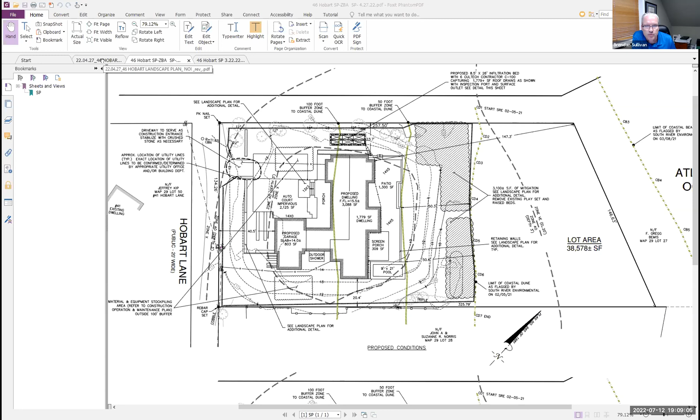Floodwaters come over the dune, they go around the house, and then they pretty much go out to Hobart and then down Hobart, ending up heading down towards Charlie's house over on Lothrop Lane.

I believe you received the revised plans and also a memo supporting the petition under the special permit guidelines for section 300-9.7H. I think I've addressed all of those issues in that, and I think that's really about it.

Okay, board, questions of the applicant representative? One thing that came up - this meeting was originally in May, and looking back at the notes, John Hallen had made a comment regarding the pool's proximity to the house. I think when he made that comment, I was looking more at the pool's proximity to the side and rear property lines.

My understanding, looking at it further, is that the pool would have to be 10 feet distance from the house wall for electrical and fire safety purposes. Looking at the site plan, it doesn't seem to achieve that. If we were to try to achieve that, it would push it beyond the 50-foot buffer. I'm not sure if you've looked at that issue.

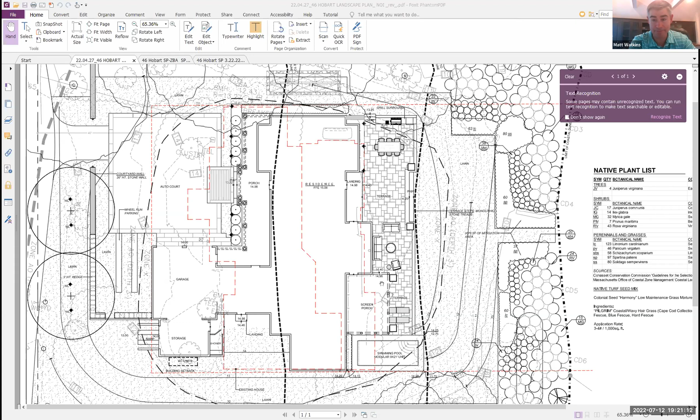And then Brendan, can you walk me through the memo that you submitted, if you have it handy? Again, to Dave's point, I know these are very minor alterations in the floodplain. I don't have any issues with the plan, but I reread number 1 a couple of times and was trying to understand the corner of the proposed pool. If you don't mind, just walk me through number 1 one more time, just for my own sanity.

Yeah, so it's this triangular piece, the corner of the proposed pool, which is down here. Because this type of floodplain is shown graphically on the flood map, not by elevation, and it circles around the existing house, similar to the one next door. The intent was obviously to take the existing structure out of the floodplain. So this dashed line here is the floodplain as it's transposed from the flood map. The corner of this proposed pool is this triangular shape here, and that is the only portion of the pool that is in the floodplain.

As I said before, the way this floodplain works is there's a coastal dune out here. The waves come over the dune, crash over it, run towards the house, and go around the house to either side. The existing structure is actually wider than the proposed structure. On the northern side, we came back a couple feet.

We're really not changing the grade on the sidelines much. We're reducing pavement totally around the southerly side. There's currently a garage under the southerly side of the house, which is all pavement, and there's even some pavement that spills onto the abutting property that we're getting rid of. So those floodwaters will now run over a vegetated lawn area instead of pavement, which would slow the water down and promote infiltration. And overall, believe it or not, we're decreasing the impervious surface by about 100 square feet. So with all that, we think this meets the provisions of the bylaw.

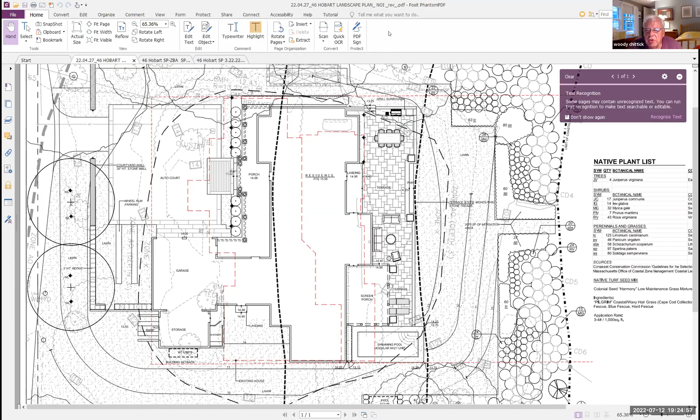Yep. Charlie, are you muted still? Charlie is recused from this one. That's right, sorry. So he's not voting. So it's a 5-0 vote to continue this hearing until August 15th. Thanks.

Okay, we will move on to the third. Either Cohasset Lobster LLC or the Cohasset Wharf, I'm a little confused as to which title, but it's all the same, at 46 Border Street. And we will, I'm assuming, hear from Attorney Adam Brodsky, who's representing the owner of this property. Is that correct, Cassandra? Yep, I'm bringing him up now. Okay, great.

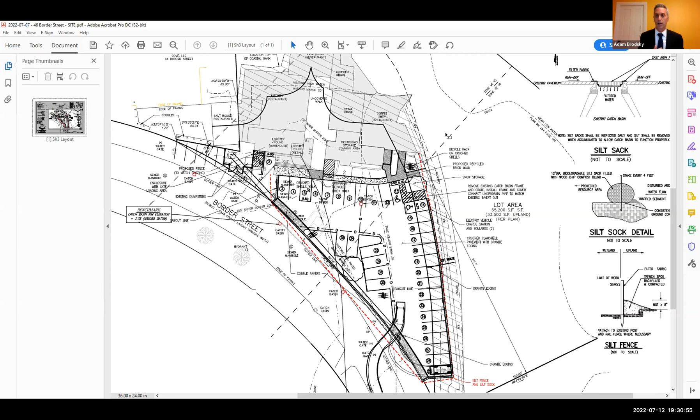You should also note that Cohasset Lobster is committed to purchasing electric vehicles called Rivians, which they want to use for transporting potentially employees as well as potential customers. As I said, under this proposal, the board controls the final approval of any off-site parking, but we need additional time to finalize that. Gabriel is prepared to answer Mr. Higginson's questions - he provided an email on July 8th with a summary of his conclusions and also provided a sketch. He's available when I'm done.

Ideally, we'd like to reach at least an agreement in principle with respect to parking this evening. We've continued both our planning board and conservation commission hearings until we've reached final agreement, or at least a constructive agreement regarding parking, because that affects the layout of the site, the design of the stormwater management system, and things like that. So in a perfect world we'd like to reach conceptual agreement with the board that we've addressed your parking concerns this evening, so we can go forward with our other permitting. With that said, I'm happy to answer any additional questions, but Gabriel is prepared to present and answer Mr. Higginson's questions. Why don't we get Gabriel's response out of the way first? Yes, sir. And then we can deal with any lingering parking issues beyond that.

Good afternoon everyone, my name is Gabriel Padilla, I'm with Grady Consulting. Can everyone see my screen? Yes, I can. I think so. Make the assumption. Perfect. So the questions that came out of the last meeting, in regards to some spaces - space number 1 actually has conforming dimensions, 9.5 by 20. Same with number 2.

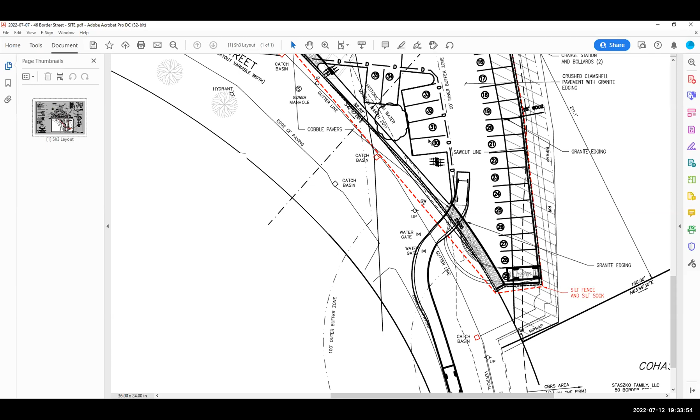So those were the questions that they had. If you have any other questions, I'll be glad to answer them. Okay, Board, anybody have questions? Or if Charlie could unmute, maybe we could hear from him as well.

I thought this was unambiguous, clear. But that's a party of one. Any other questions on the part of the board? Guess not.

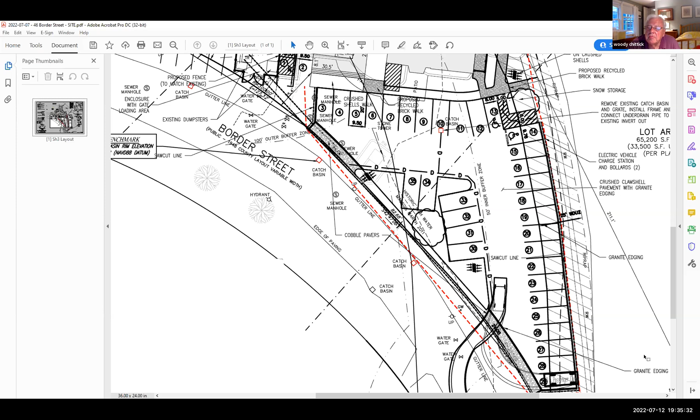Okay, well, we can always come back to that if somebody is coming in late. But Adam, I've got a few thoughts on what can be done, what you can do, and what you're not empowered to do, but might be supportive. We can talk about some of those measures which are really off-site in one form or another. But do you want to present, go forth with the fact that you think your parking complies, but you're not giving up trying to find some off-site parking? I'm putting words in your mouth, but for employees and patrons as needed.

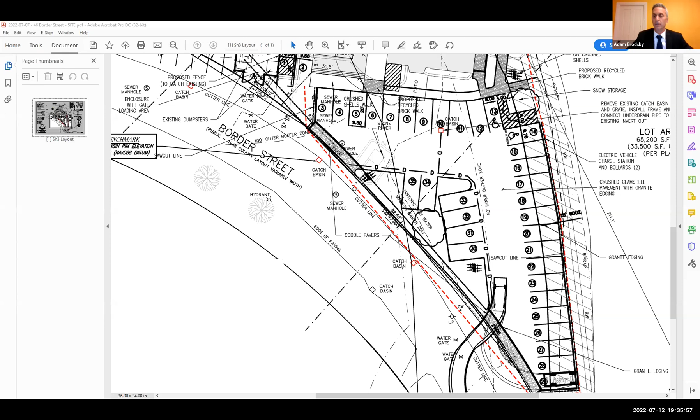Yes, sir. Again, just to be brief, we believe that the proposed on-site parking conforms to your parking requirements, and we're trying to address the board's concerns about additional parking for employees. So we're willing to agree as a condition of any special permit that we have to identify 10 additional parking spaces off-site, subject to the board's prior approval, in order to satisfy that requirement.

Okay, let me talk about a couple of things. I think one of the issues is the physical layout of Border Street itself. You're not responsible for that, nor are we per se, but I would like to think that we could go to the select board at an appropriate time and deal with parking as it extends from the former Mill River Marine all the way down to the Veterans Memorial on the following basis.

Request that there be a kind of physical reconstruction of the sidewalk with actual curbs as opposed to rounded curbing. It seems to me that rounded curbing invites people to drive up on the sidewalk and park. If you go down to the Common in Cohasset and see what they've done there, those are basically granite 90-degree angle curbs, and there isn't parking on the sidewalk down there now. There used to be, but I think the town has it within its authority to clean up that anomaly.

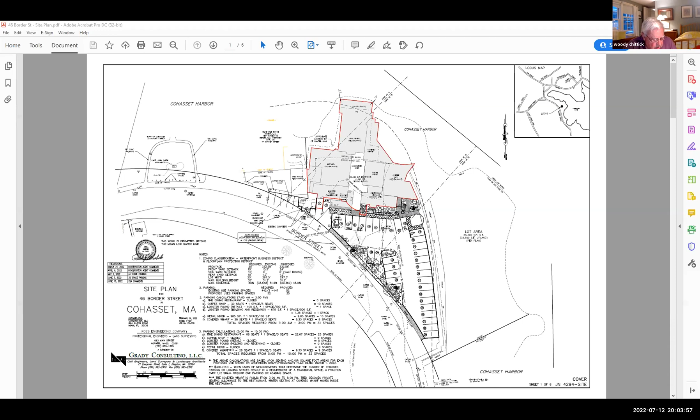Chairman, it's Adam Brodsky again. What a surprise. Okay, it's your lucky night. And obviously I represent... Do we have a trifecta coming up with the Whoriskeys? No, I believe that Mr. Orenberger's office represents them.

This board's familiar with the property at 103 Border Street because it approved a special permit to reconstruct the existing non-conforming dwelling just prior to the Lubitzes purchasing the property in 2014. In fact, they purchased the plans for that project, which is comparable in size to what is being proposed this evening, but candidly was just not aesthetically consistent with the historic character of the neighborhood. So we have a different proposal to present.

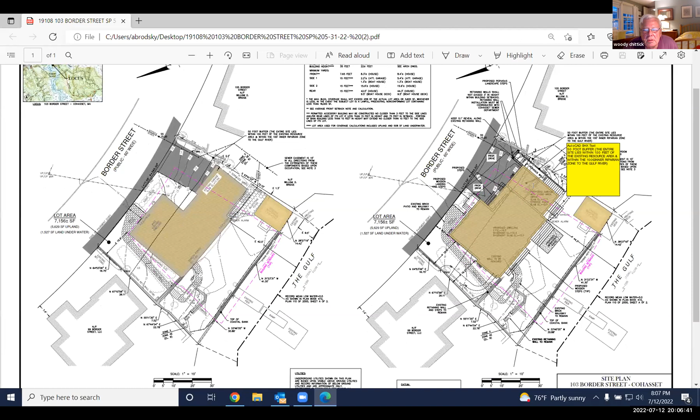This concerns a pre-existing non-conforming lot with 7,156 square feet located within the Residence A zoning district. May I share my screen and I'll try to display something. Should be able to. Thank you. One moment. Can you see the site plan? I can, I guess, down at the bottom, existing and then proposed. Yes, sir. Thank you, I'm impressed with my limited computer skills to be able to do this.

That is correct. The existing conditions are shown on the left side of the site plan, and the proposed conditions are on the right side. You'll note the existing dwelling on a non-conforming lot. A portion of the lot is also located within the FEMA AE flood zone elevation 9, and you can see the flood zone essentially cuts through the building. The lot is improved with a Greek Revival dwelling that I understand was originally built in approximately 1880 by Portuguese fishermen. As I mentioned, the Lubitzes have lived there for close to 8 years.

The dwelling is candidly outdated and not suitable to their family of 5. It's also uneconomic to substantially repair it, and so they're proposing to raise and reconstruct the existing dwelling. The existing dwelling is non-conforming. It extends into the side yard setback to the south, and the attached garage is only 2.2 feet from the sideline. In the A district, we're required to have 15 feet.

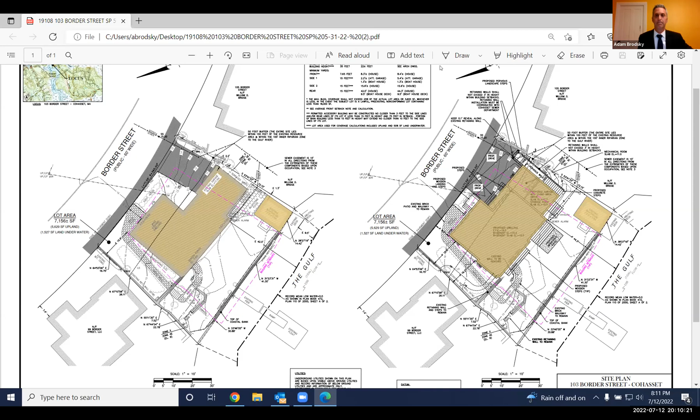I'm happy to pull up the architectural plans. I just want to speak a little bit about those, if that's all right. You're not changing the boathouse, I assume? That's correct, we're only talking about the dwelling. So excuse me one moment.

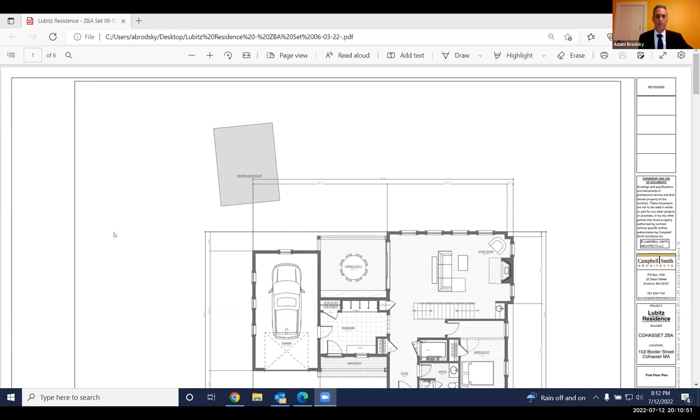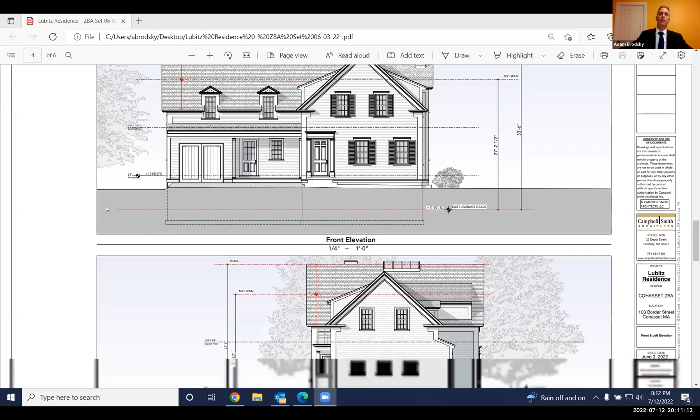Hopefully you can now see the architectural plans. I'm going to go to the elevations. This is the front elevation from Border Street. You'll notice that the structure will be 2 stories at the street, and from the rear will be 3 stories, the left elevation from the rear.

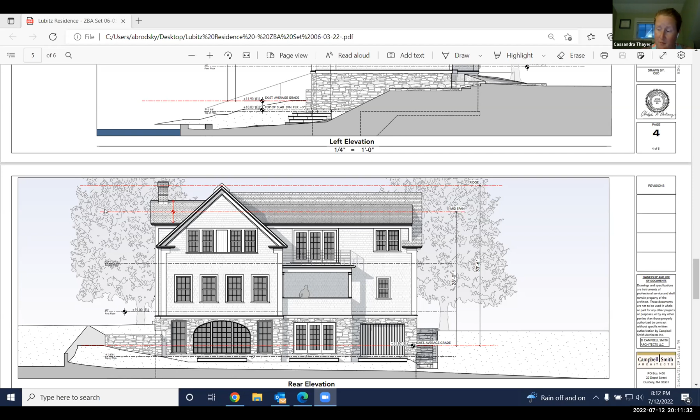The proposed building height is 33 feet 4 inches, obviously less than the maximum of 35 feet as depicted on this elevation.

The building volume within the setback increases from presently 2,040 cubic feet to 3,948 cubic feet. And the total gross floor area within the setback increases from 476 square feet to 568 square feet.

I should note, and I probably should have pointed this out on the site plan, there's an existing driveway which actually slopes steeply down from Border Street and creates a really unsafe condition trying to back out of that steep driveway to get to Border Street. The Lubitzes are proposing to regrade and widen that area, so the driveway will slope down to Border Street, making a much safer condition.

Importantly, the existing dwelling is non-compliant with respect to flood compliance, and the new structure is going to comply with the state building code flood-resistant construction requirements in all respects. Because a portion of the structure is within the floodplain, we need a floodplain special permit under section 309.7H. The project will require an order of conditions and a stormwater permit from the Conservation Commission that will ensure compliance not only with the state.

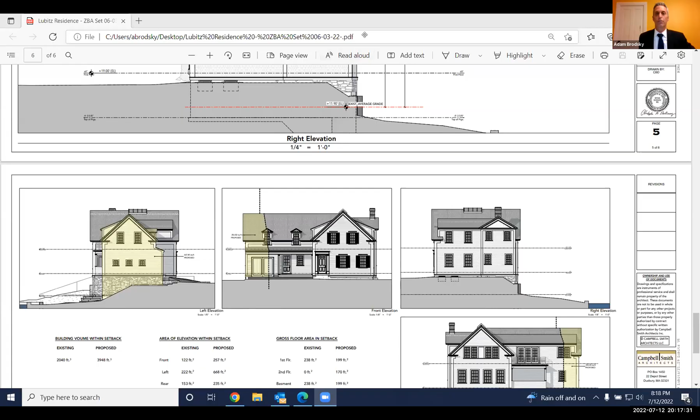And it's not the property writ large, it's the proposed structure. Yes, sir.

I think the problem here is that it says the land, if the land is subject to tidal action or adjacent to tidal waters, the proposed structure is not less than 10 feet above mean sea level. Your response is it's not subject to tidal action or adjacent to tidal waters, but it is. But it is above 10 feet above mean sea level. Yeah, that was my point. I don't think adjacent is the issue. Is it or is it not more than 10 feet, which I think it would be. It is, so I think you've satisfied that.

Your one-liner doesn't accurately reflect what you need to do. I note the problem. As Charlie said, it's not really shedding light on it, doesn't affect anything.

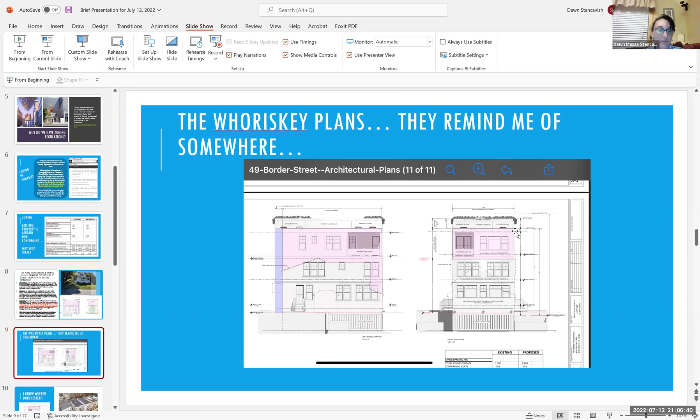So, this is again a close-up of the plans. This is the block itself that is being proposed. It was called a beach house. It doesn't really look like a beach house to me, because the only thing that could come to my mind was this. And I really don't think that this fits into Cohasset Harbor.

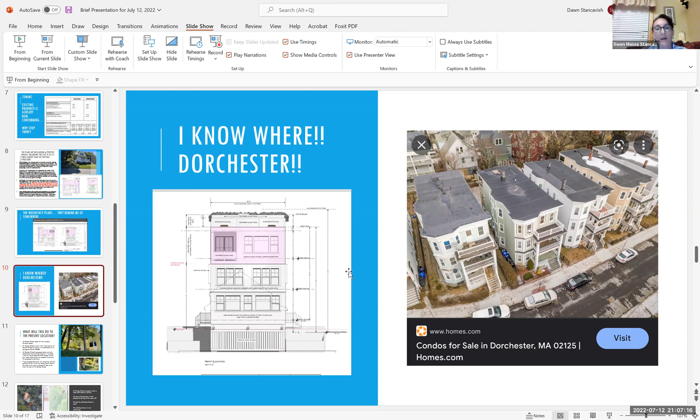And I'm all for wanting a family to have space, and we're very happy if the Whoriskeys really are intending on staying in this home. It's just unfortunate that it went from conversation straight to, okay, if you're not gonna work with us, we're gonna go to the full max that we think that we could get away with. And what will this really do here?

Next slide gets into how that affects the FEMA zone. But it just doesn't have the proper physical space for what's proposed. And to say it's only a little bit outside the existing footprint is a gross exaggeration. These pictures kind of show it all.

Here's the plot of land right here where my cursor is. That's 49. This is 51. This is the sky view from the Whoriskeys documents. This red line is roughly where the property line is, but it's also directly where the cliff is. And that's very rough, but it gives you a visual of, as the crow flies, how closely these homes are already to each other. And the fact that it's not just a flat surface here, it's a rock cliff is what is very concerning.

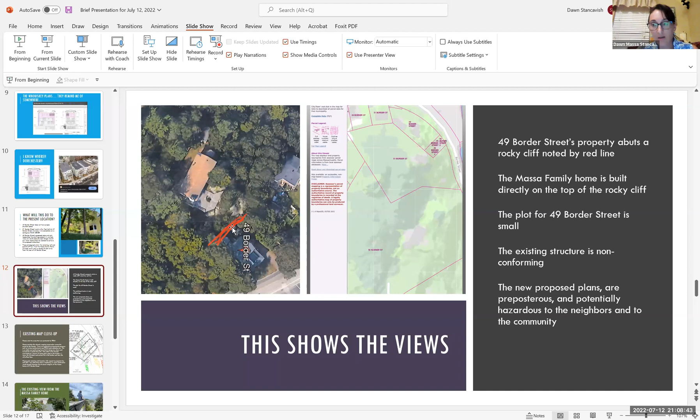So in this - could you just take a breath for a second? Sure. Why does a rock ledge concern you, or why should I be concerned?

Oh, thank you for asking. I'm happy to answer that. Because whatever proposed means of construction with heavy machinery or any other thing that might be needed to dig up a foundation in a rocky area, where it's all granite and it's all kind of stuck close together - if anything cracks within that rock cliff, the structural integrity of my family home is immediately affected. And it's also a harder location to do any repairs to.

If you damage that rock cliff, I don't know how you'd even go about fixing that. If that integrity gets damaged and the house gets shaken up, and the pipes and everything are also damaged, that's a huge liability.

I'm concerned for my family members' well-being, for her mental health, her psychological health, her physical health. And I'm concerned that all of her utilities go from the street between the properties up to her house as well, and it's a weird layout of how those things are because of the rock that's there. It makes me very concerned about how it could impact her life and the actual property that my family holds.

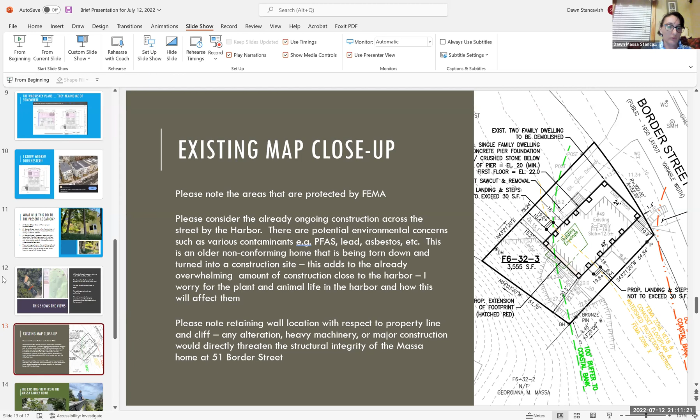A brief story of what happened: my in-laws lived in New Jersey. A home was built too close to their house. It cracked their foundation, it was condemned. My elderly grandmother-in-law had to be physically removed professionally by ambulances because of what they did. If you think I want to sit and let this happen to a family member, you're out of your mind. I can't do this again. I already went through this, and it wasn't even as dangerous as what this is.

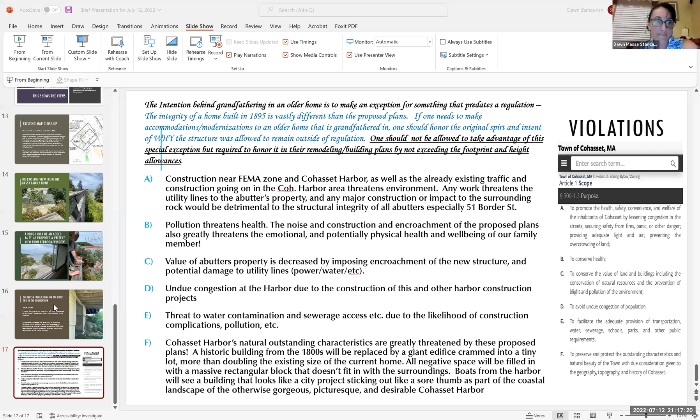Would you go to the next to the last page? Yes, one moment, I'll get it back up. Yeah, the one before this one. Yep, here it is.

Okay, let's go to the second paragraph. I'm not sure I understood—the building plan proposes an approximate volume increase exceeding 30,000 cubic feet beyond what is presently allowed by existing regulations. What existing regulations are you referencing?

I'm referencing the zoning regulations referenced here. So what they're saying in the non-conforming volume is 26,474. But what I said here was that they didn't count the top deck as part of that calculation, which is approximately 4,000 cubic feet. So that should be added to the 26,474, which it is not in their plans. That brings the total to beyond 30,000 cubic feet over the regulations.

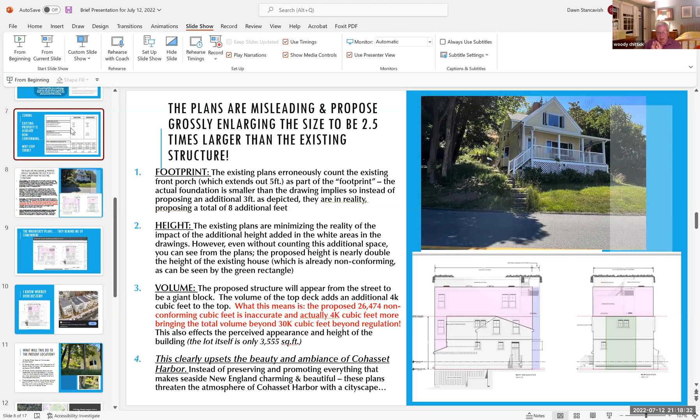And the regulations being the pre-existing non-conformity. Exactly. That's the 30,000 proposed additional. It'll be, instead of—like right now it's here—instead of this, that's a misleading number because they didn't count the top deck.

Well, certainly, just sitting here, it would seem to me they have to count the top deck. That's volume, and it's volume for human habitation, whereas the bylaw deals with habitable space. So it's habitable—there's no question.

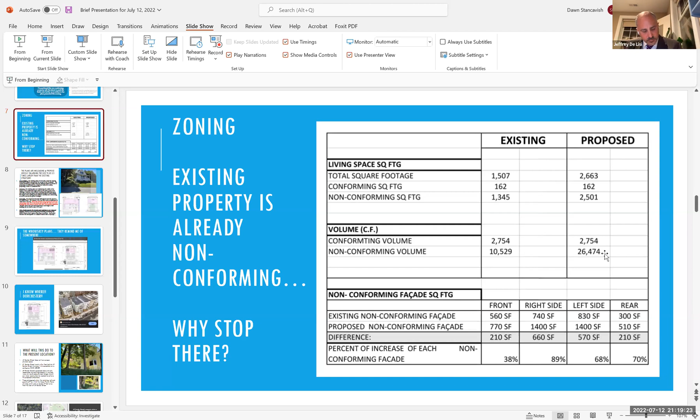If I may—as we're listening to the presentation, I'm recalling a conversation we had with the board involving the building inspector, Mr. Hallen, on the Ryan Stasco property, the Jerusalem Road property. There was a discussion about a roof deck, and I believe Mr. Hallen expressed an opinion that because it was not covered, it doesn't count as part of the calculation. So we might want to check with the building inspector on that.

I don't see it in the bylaw. That's the problem—that may be his interpretation, but it's not the way the bylaw is written. Except that he is the only person in the town charged with the authority of enforcing the bylaw. Well, we're charged with enforcing the bylaw too. Right, but he makes the first interpretation, and depending on his interpretation, the determination is made and brought before the board, right? Right, and we could accept or deny that interpretation—we don't have to accept his interpretation.

So where in the bylaw does it say that the deck counts as habitable space? How do you count habitable space which is uninhabitable in the wintertime? It's still habitable—it's habitable in the summer. I'm not saying it's 365 days a year, 24 hours. But to that point, it's a deck, and you would not include the area of a deck as habitable space.

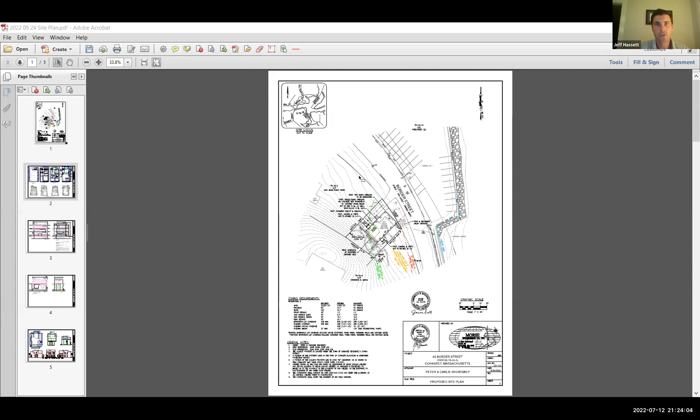But at any rate, Jeff, why don't we turn it over to you then? Sure, thank you very much - the other Jeff. So on the site plan, this property, as you know, is on the westerly side of Border Street, with the Atlantica, or formerly the Atlantica parking lot, directly across the street beyond to Cohasset Harbor. The Massa property is shown on the site plan to the west as well.

So the site plan does correctly label the front yard setback measured to the existing porch. This is a front porch with a roof over it, so the front setback is indeed measured to that. Typically we do not include outdoor space in the floor area. However, if you looked at the assessor's card currently for the finished area, it would not include the porch area, and certainly not decks. The house being proposed is 2,600 square feet, not including the deck.

So it is consistent with other homes in the neighborhood. It's not a monster home. The footprint is 24 by 42, which is the same size footprint as the existing home. I understand we are going up.

As far as the height, the first floor we're proposing is at the lowest elevation that's allowed, because the property is in a FEMA floodplain. And then with the flat roof, it's elevation 52. The site plan shows topography offsite based on LiDAR topography, which is usually generally very accurate. The contours aren't labeled on this plan, but I can tell you they vary from elevation 52 to 64. So the ground immediately adjacent to the Massa home is slightly higher, or several feet higher in elevation, compared to the roof of the proposed structure.

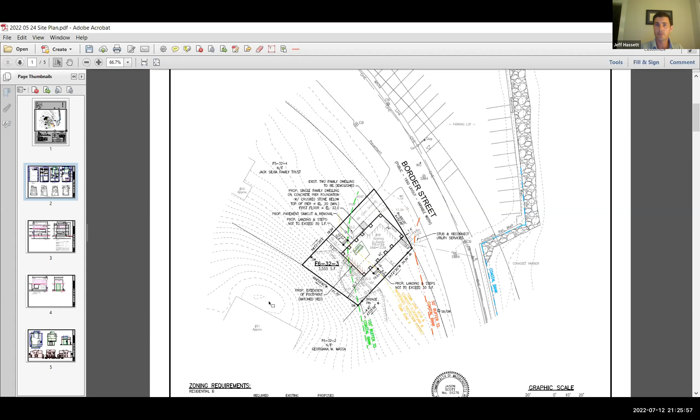So we're not talking about a massive ledge removal operation for a basement or full foundation. It's simply going to be supported on concrete piers, which they will excavate down to ledge and then drill it with steel rebar into the ledge. So I really am not concerned that this project would alter or destabilize that ledge face behind the house. And certainly the project is not going to interfere with any of the utilities servicing the home either.

So that was just a list of a few things that I wanted to comment on. With that, I'll turn it back to you. Good, and Jeff, as we're going through this, if you would commit that to writing, that would be very helpful so that everybody can get an accurate depiction of what you're saying.

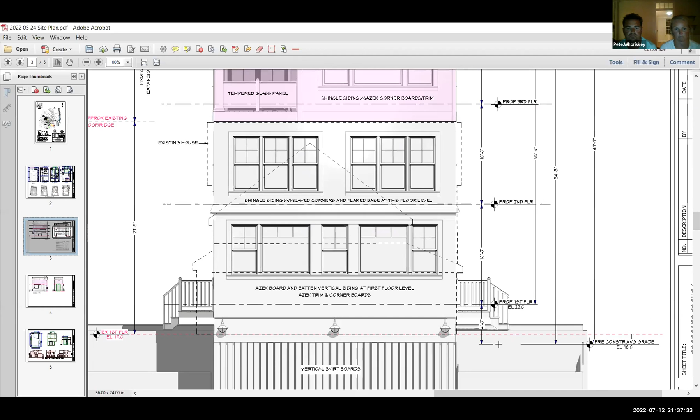Okay, good. So we have a couple of different perspectives here, and I want to sort of study the plans and come to grips with starting points of measurements and so on and so forth. But we shall see.

So the plan I'm sharing now shows the pre-construction grade at elevation 18.0. Measured 34 foot 3 inches to the roof deck. Well, the 34.3 doesn't include the roof deck. That's correct, to the decking. Well, so we've got to include the roof deck, which is another 4 feet.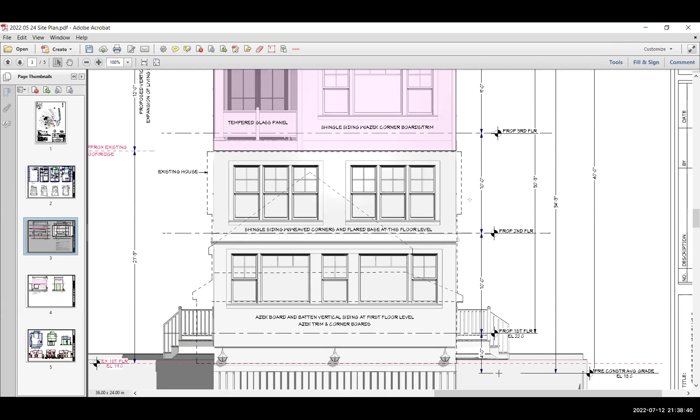And that's also 3 feet above where the existing ground floor is - you raised the whole thing by 3 feet. Okay, well, we've got plenty of time to go over facts and figures, but not here tonight. I agree, but I think some of these dimensions have to be recalculated or represented. I certainly don't agree with the 34 feet there, but that's a party of one.

So I would make a motion that we continue this hearing until August 15th to consider points made by the masses, including the presentation and contrary points of view presented by the applicants, and we'll get a look at the - well, it's habitable space. I mean, clearly they've got chairs and things on the roof deck, so the roof deck, in my estimation, counts, but I'm more than willing to consider a contrary point of view as to why that isn't habitable space.

But as somebody suggested, that might have to be a condition. I don't know, that's a bridge in front of us. So I've made a motion to continue this hearing. We have a policy, both sides - Jeff knows this full well. Notice has got to be given to the Board of Zoning 7 days in advance of our hearing. Don't try to cut it too close. If you're too late, we'll just have to continue or not consider it, so I'd rather not be in that position.